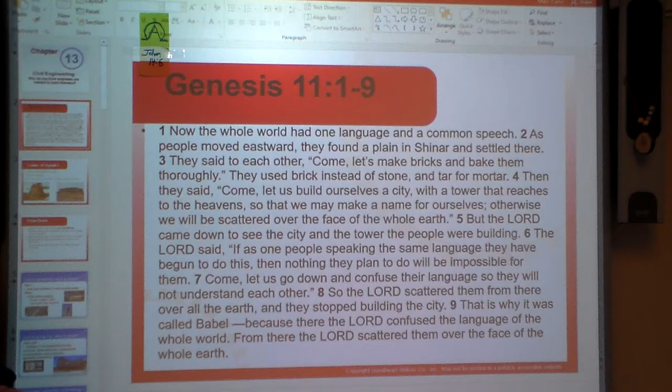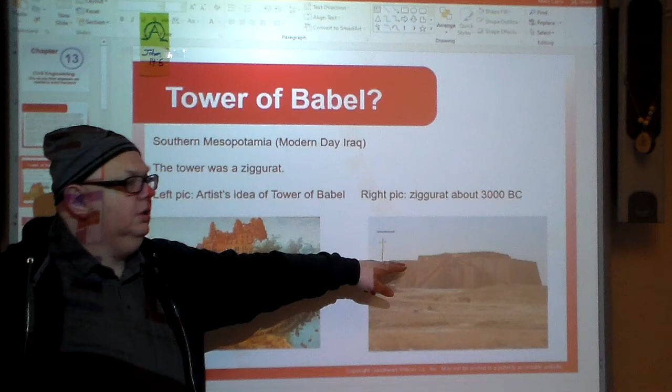We first opened up with the story in Genesis 11, 1 through 9, the story of the Tower of Babel. Look it up. There's definitely some engineering stuff here, some civil engineering action going on. They do believe the tower was a ziggurat, and the ziggurat about 3000 BC looked like this, but this is the artist's idea of what the Tower of Babel may have looked like. Happened in southern Mesopotamia, modern day Iraq.

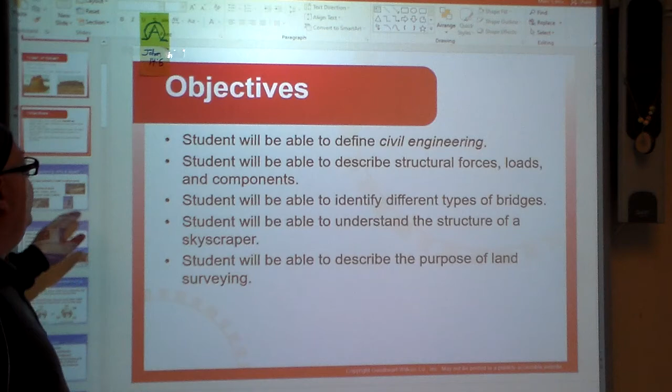Now, why? What's up with civil engineering? Well, you're building safe facilities to meet societal needs, like public works projects, roads, bridges, dams, municipal water systems.

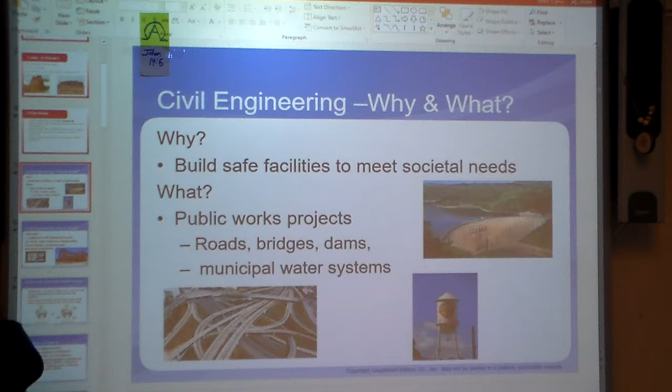What else? Well, there's different subfields within civil engineering, so you can look at structural engineering, water resources, transportation, environmental, construction, and geomatics engineering.

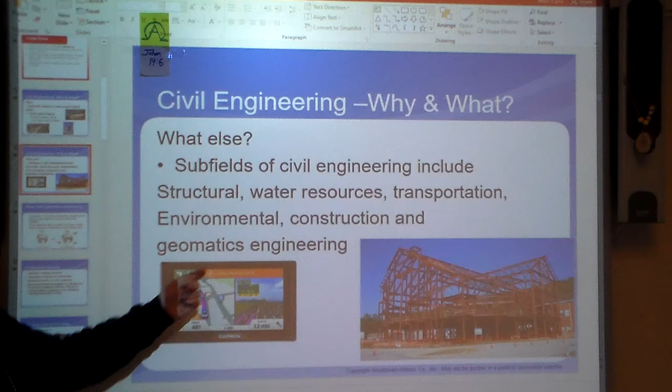This is more related to geomatics engineering here. Geomatics, you're looking at measuring, analyzing, and using spatial, that means 3D space, data from many sources like satellites. There's different purposes for the satellites. Some it'll be land, airspace, water areas, in some cases possible construction sites or areas where there are mineral deposits.

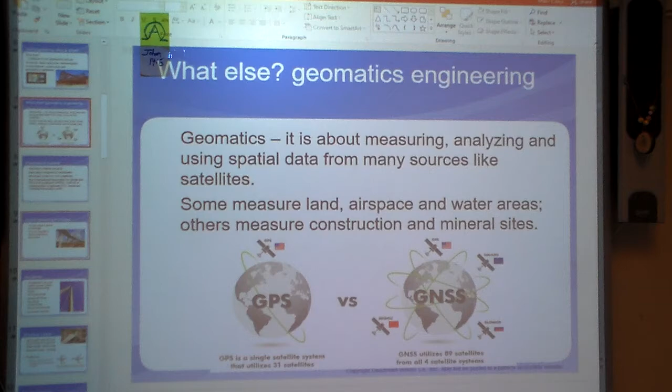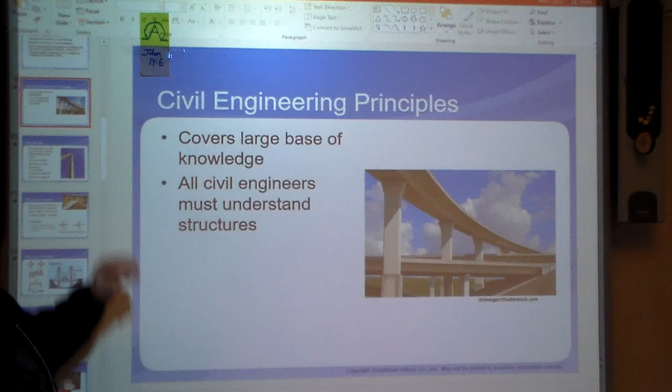Civil engineering principles do cover quite a bit of knowledge. They have to understand structures. Well, what do we mean? Arranging the parts so they remain stable while being able to withstand forces, like structural loads, when you're putting something heavy, for example, on a bridge. That would be good, okay?

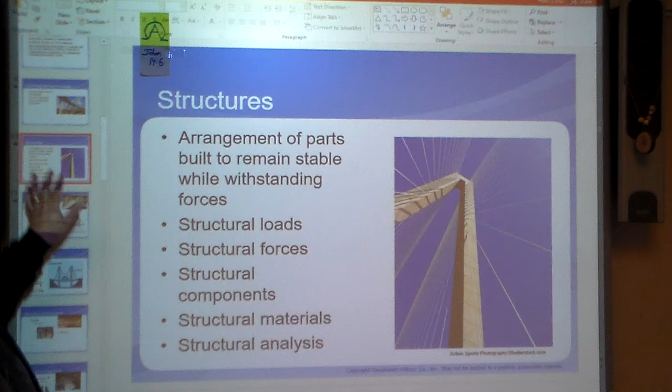There's also structural forces that are involved. Those would be forces that the structure itself puts out. Structural components, structural materials, structural analysis, okay?

So when we look at loads, we're looking at how structures transmit the load from the structure into the ground. Static loads are non-moving, dynamic loads are moving. So when we talk about equilibrium, okay, we have opposing external forces and they transfer the load throughout the structure.

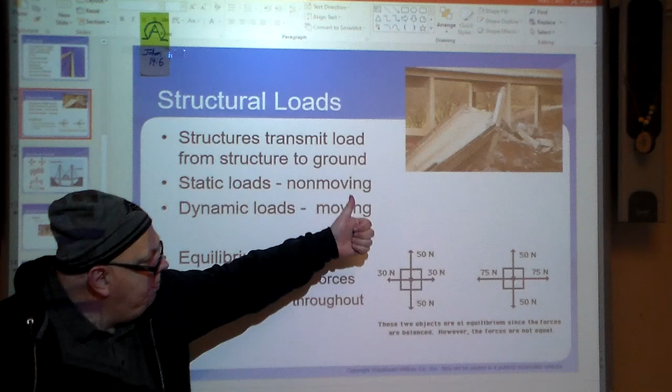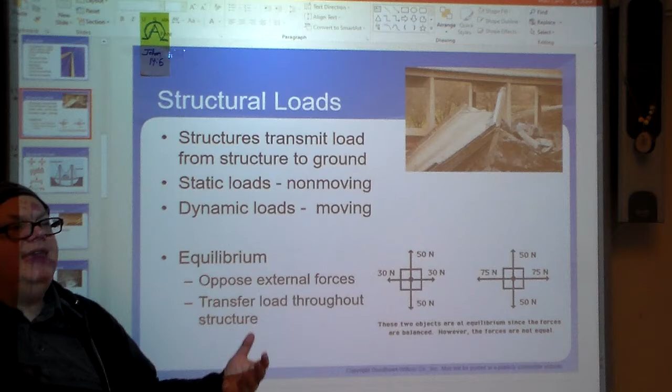So here's an example here of two diagrams that shows equilibrium. 50 newtons up, 50 newtons down. They're opposite forces, therefore they cancel each other out. So the box isn't going to move up and down, right? It's static. It's going to stay there. 30 newtons to the left, 30 newtons to the right. That is also stable, and nothing is going to change for that.

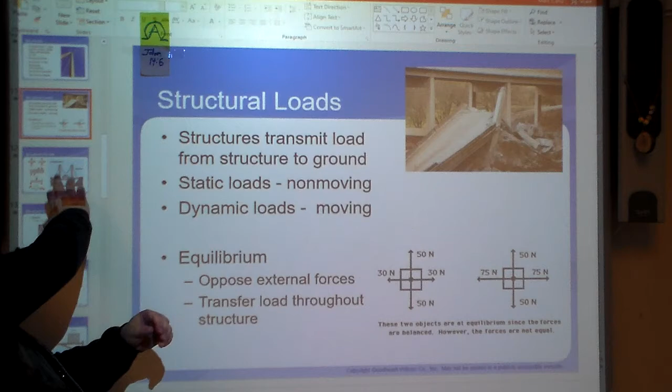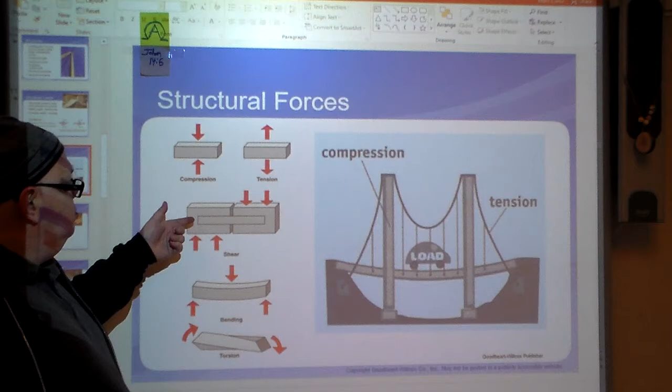We looked at structural forces in terms of bridge, okay? Where you have compression and tension forces. Where you have a load, it could be a box, it could be traffic. You have compression where it's pushing down, but you also have tension which is pulling up, especially in terms of the cables. Now there's movement, like there's shear movement, there's bending, and there's torsion. Torsion, think twisting.

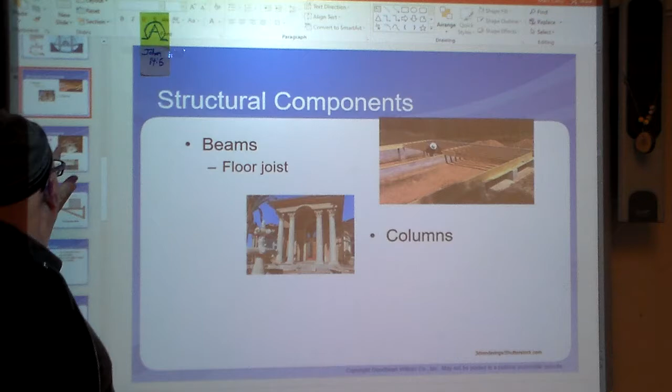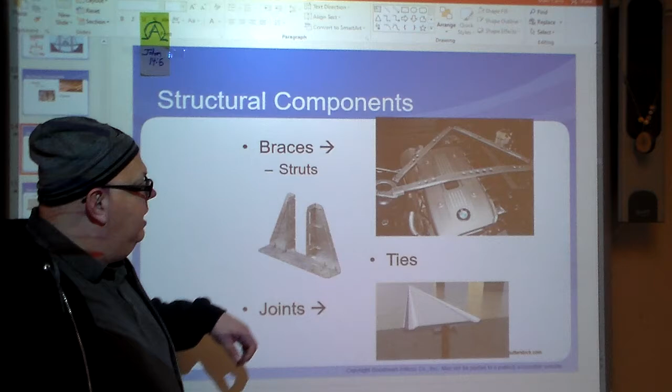So beams, like structural components, like a floor joist, like you're seeing here in this picture, a column, okay? Then you have braces, like struts, making sure that an engine is secure, although I've seen more struts dealing with car batteries to keep them secure in the engine compartment. Ties like this that will allow pieces of wood to be nailed in securely, and then joints which will unify two pieces there. So it makes it one on the surface, not necessarily underneath here.

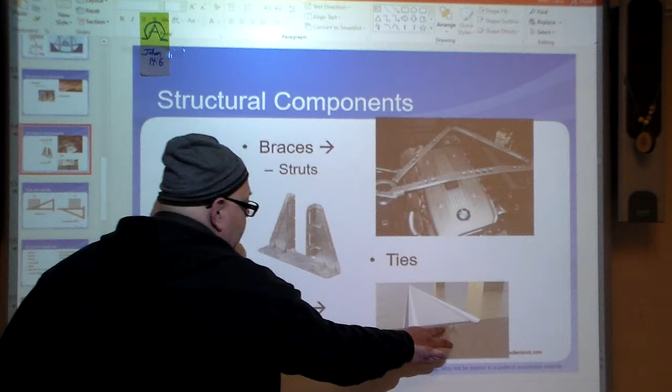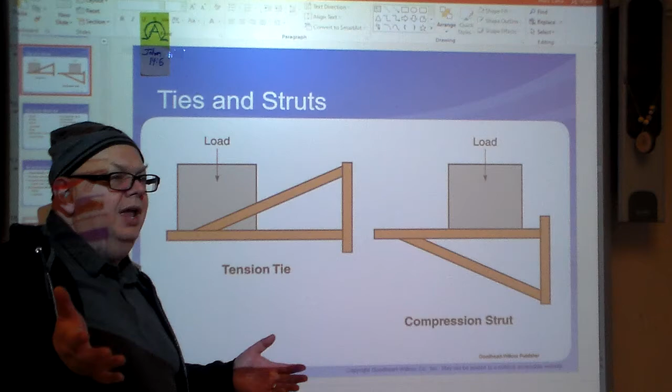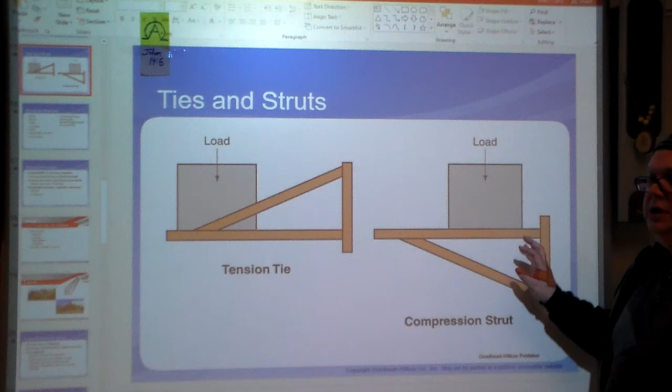We looked at the idea of tension tie and compression strut. So when you look at these, they're both the same shape. It's a right triangle. One is right side up, the other is upside down. So this is a tension, and the tension is here. Okay? Whereas when you're looking at the load being pushed on this, but it's also being supported by this. This is a compression strut, for example.

When we look at structural materials, there's all kinds of things. Every material has abilities and disabilities, so to speak. It's depending on the property of the material.

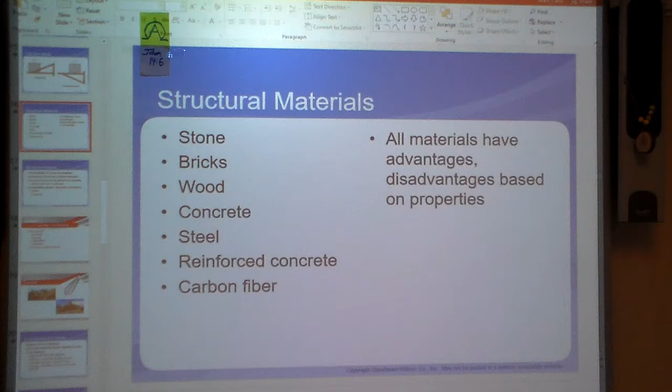Structural analysis. Well, that goes into the area of structural engineering. You got to make sure that the structure has sufficient strength to hold up the loads. You ensure that the structure is as efficient as possible. In other words, it doesn't cost too much. You use the minimum amount of materials needed to get the job done properly. You make best use of the materials. So you still need to throw in physics, especially mechanics where you're dealing with statics and dynamics.

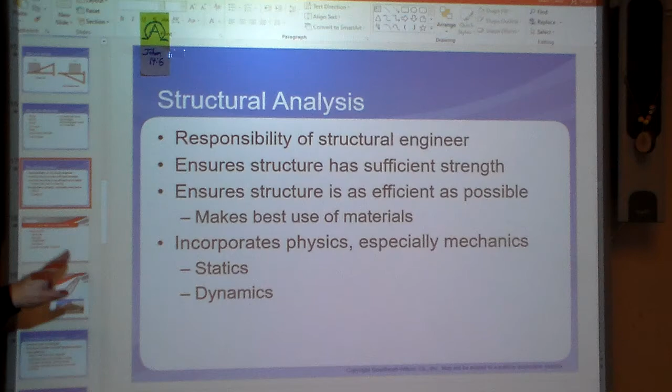Then we talked about civil engineering software. Now, that gets to be field specific if you're dealing with designing a bridge, for example, or you're designing a skyscraper, for example. All those things come into play, and they also include symbols in there.

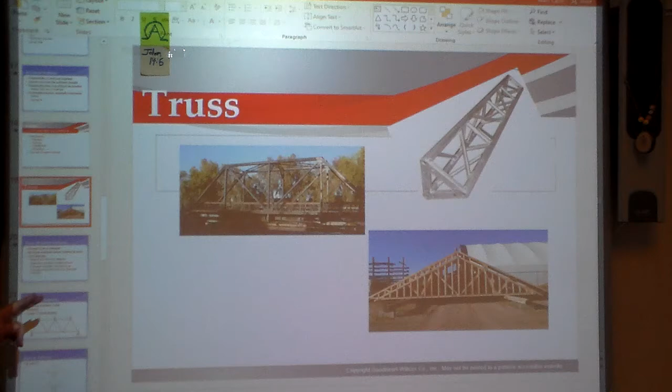Trusses. These are examples of a structural component known as a truss. A truss is a triangle, okay? And you can see there, those are trusses used in the real world. Now, the simplest truss is triangular. The structural members are pinned together and are called joints.

The truss analysis, you start with the free body diagram, you determine the structural stability of it, calculate the reactions and the internal forces. Now, complex calculations can be done by computer software.

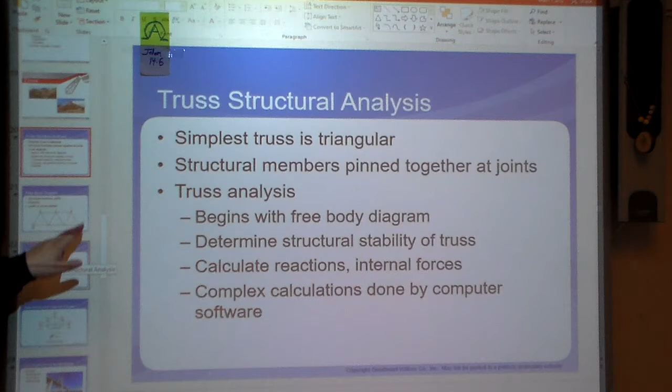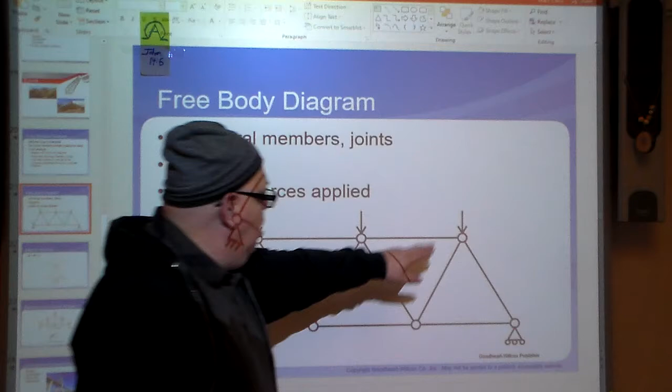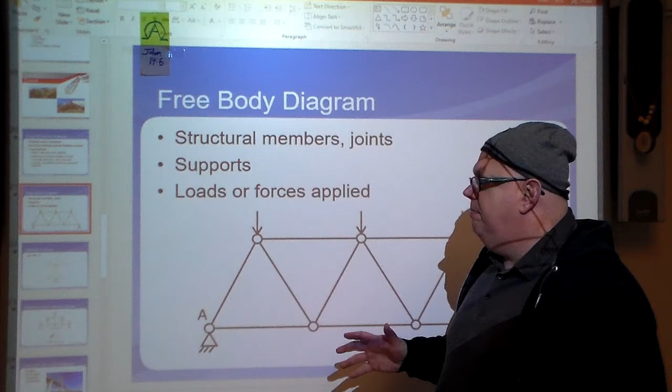So, here's a free body diagram, a basic truss system, where you have structural members and joints. The circles that you see here are, in fact, the joints where parts of the truss come together and they join, and they're bonded together. The individual lines that you're seeing there, those are called members. So there is actually a formula that can be used to calculate if the truss is stable or not.

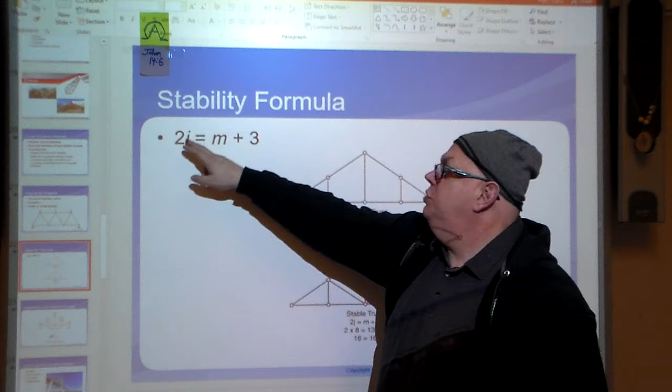So here's an example of an unstable truss. Here's the formula: J stands for joints, M stands for members. So 2 times the joints that you have should equal the number of members plus 3. When you look at this unstable truss here, you have 1, 2, 3, 4, 5, 6, 7, 8 joints.

So 2 times 8 is 16. In theory, if this thing is stable, it should also have 16 members. 1, 2, 3, 4, 5, 6, 7, 8, 9, 10, 11. Oh wait, plus 3 is 14. 16 is greater than 14. This is an unstable truss.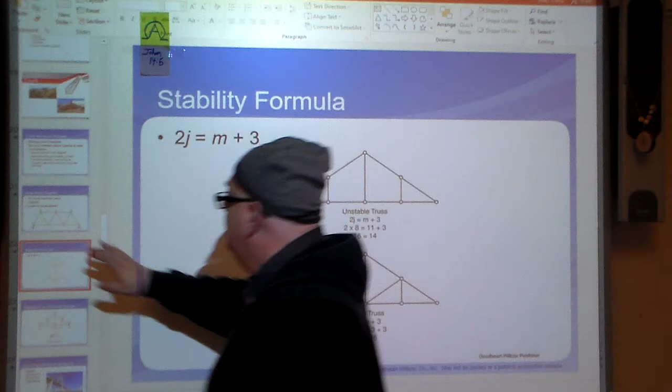But if you go and add another member here and another member here, that changes it from 11 to 13 members. 13 plus 3 is 16, which is equal to 16, and therefore this is your stable truss. This one is not. So that's one way to calculate it.

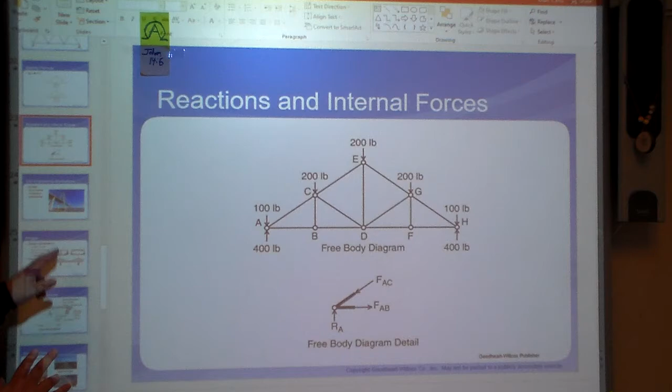Now with a free body diagram, you can also put in what forces are involved, and that does incorporate physics. Civil engineering applications like bridges, skyscrapers, geomatics engineering. We looked at bridges, talked about things like the length of the span, what kind of foundation you're going to have, what are your available materials, and basic parts like piers, abutments, and roadway.

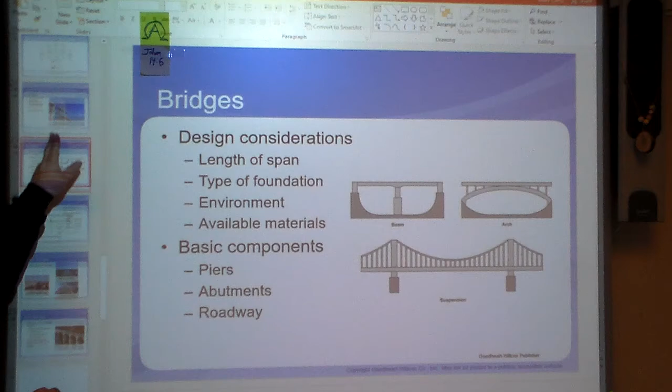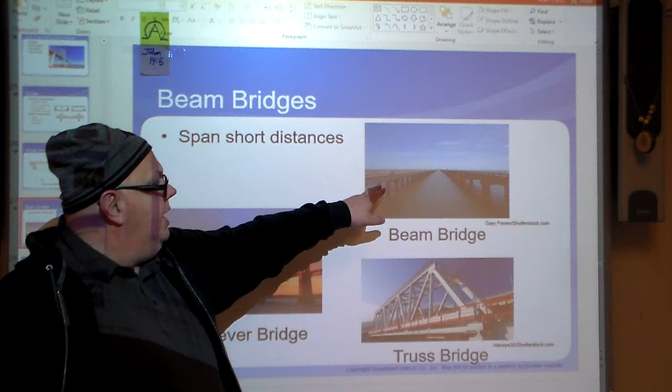So again, bridge components - this is just giving you an example of what's there as part of the bridge. This is typical bridge elements. Beam bridges span short distances. This is a truss bridge here, which typically you see for railroads, but you can use those for regular cars. This is a beam bridge, and this is in Florida.

This is a cantilever bridge where you have an upward structure and a downward structure as well. That's called a cantilever bridge.

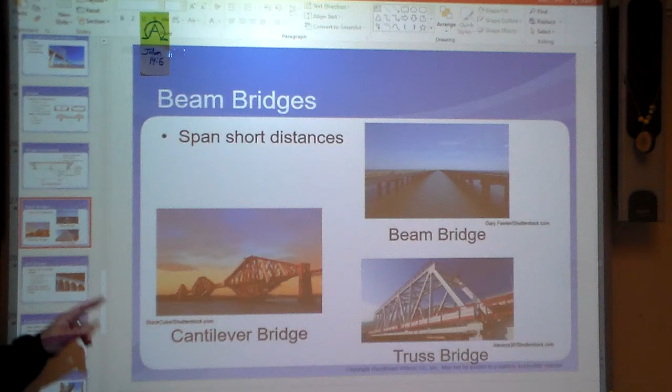Now we also have arch bridges. Arch bridges rely on the arch strength. The strength is the keystone. The keystone is what keeps the arch intact. The Romans used it for aqueducts, but we've also used it for bridges, not just for freeways but for railways as well. You're distributing the load to the abutments. The arch can support the deck from above or below.

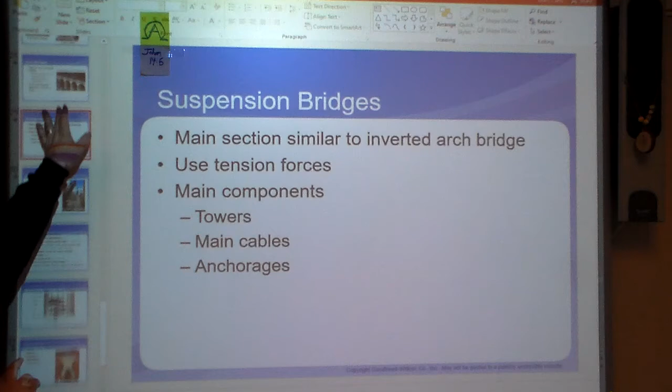Depends. Suspension bridges - it's very similar to an arch bridge, except it's kind of inverted. You use tension forces like cables. The main parts are towers, main cables, and anchorages. So think like San Francisco's Golden Gate Bridge - that's a suspension bridge. Specialty bridges are like combination bridges, where you combine two building techniques into a bridge.

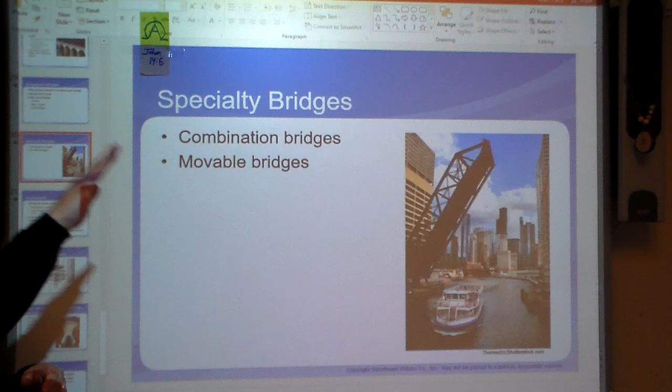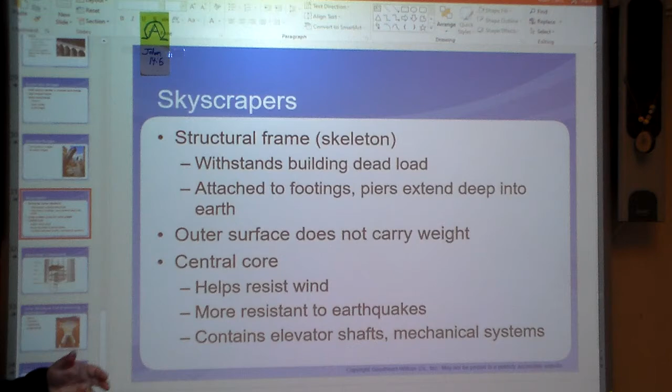The outer surface doesn't carry the weight. You do have a central core inside the skyscraper where it helps resist the wind. It's more resistant to earthquakes, and it contains elevator shafts and mechanical systems. So lots of skyscrapers are built with these in mind. If you look at a skyscraper built in Chicago, resisting the wind would be a good thing because Chicago's a windy city. If you're building a skyscraper in Los Angeles, you want more resistance to earthquakes. So that's where you have your trade-offs.

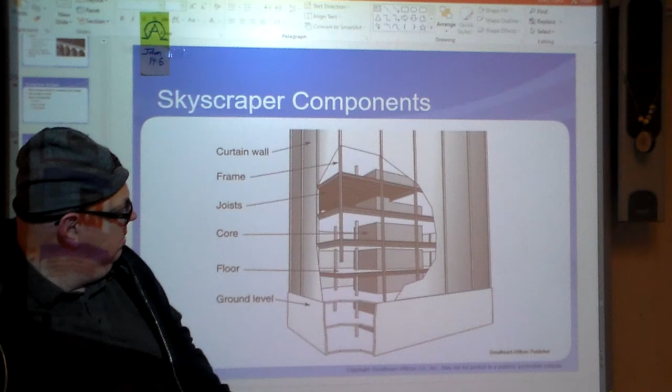So this is a diagram of the different parts. You have the core in the center there, and then you have all these beams that are there. You have your ground level, and this is under the ground level here. You have your joists going across there supporting the floor. This is your frame, and then you have your curtain wall, and that can be made from different things.

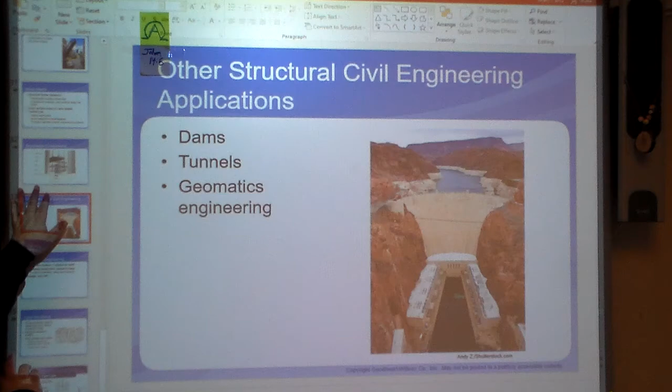How about dams, tunnels, and geomatics engineering? These are other structural civil engineering applications, like that dam right there. Here's a clue: if you look at the whiteness of the rocks, that tells you where the water level has been in the past. Just saying.

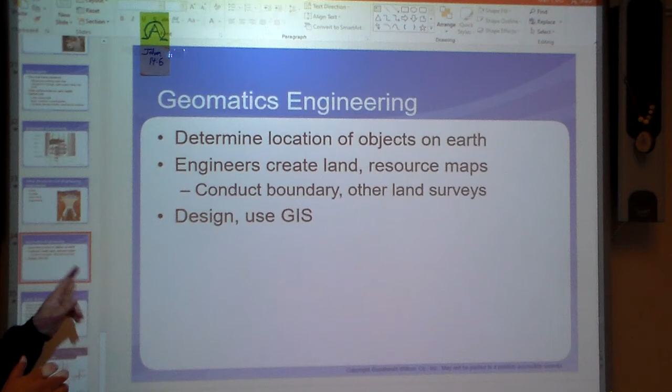Geomatics engineering - you're looking at where the locations of objects are on the earth. You create land and resource maps. You can conduct boundary and other land surveys. You design, you use the GIS, that's the satellite system for that. That helps - land surveying.

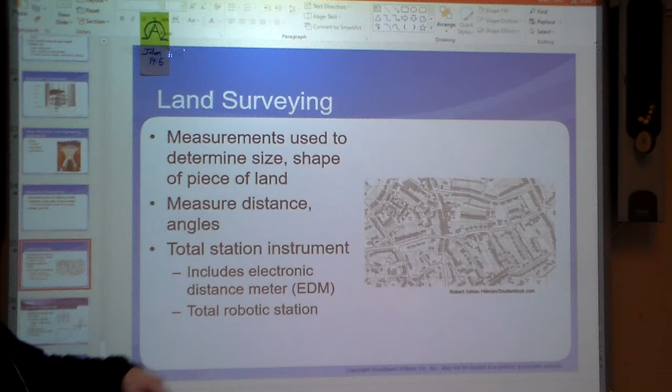That would be kind of important - what land belongs to whom. Measurements used to determine the size, shape of piece of land. You measure the distance and the angles. Oh my gosh, we're using trigonometry in the real world? Yeah, actually. The total station instrument includes the electronic distance meter, the EDM - so it's not electric dance motion or electronic dance music. Total robotic station. Moving on.

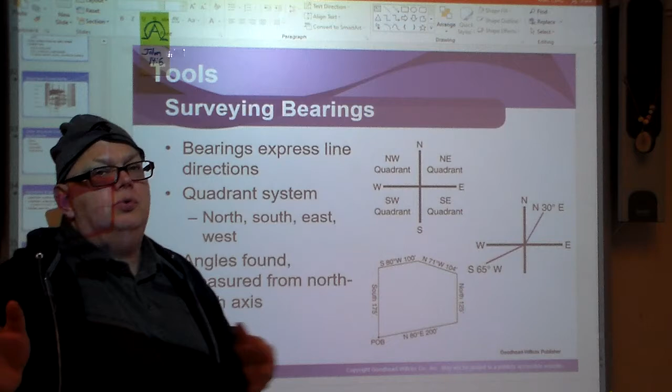Surveying bearings - so what does that look like for surveying? The bearings express the line direction, so what's the compass direction the line is going in, and how many degrees are you dealing with? That's where you get quadrant systems and the angles found measuring it from the north-south axis. For example here, you got south 80 degrees, west 100 feet.

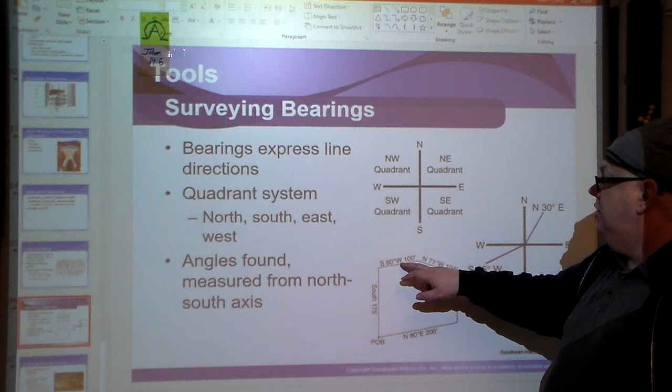As we're winding down here, ladies and gentlemen, civil engineers work in teams, and that's where ethics comes in. You have the U.S. Army Corps of Engineers - there's military works, government projects, civil works projects, and they have also been used in combat.